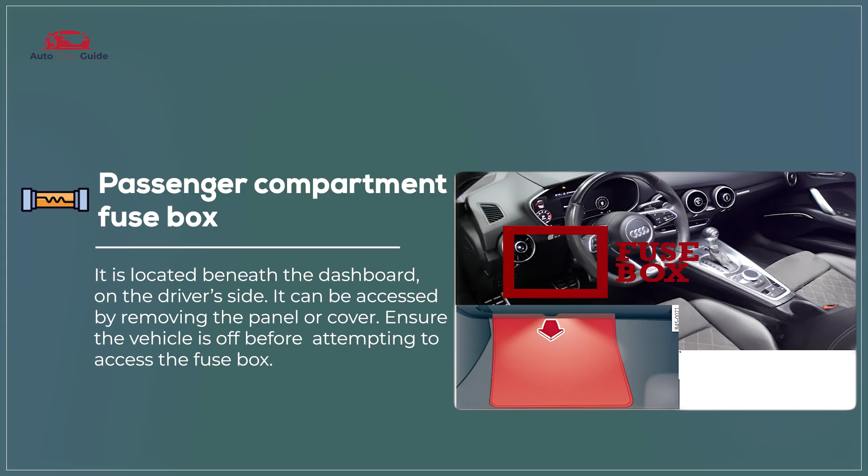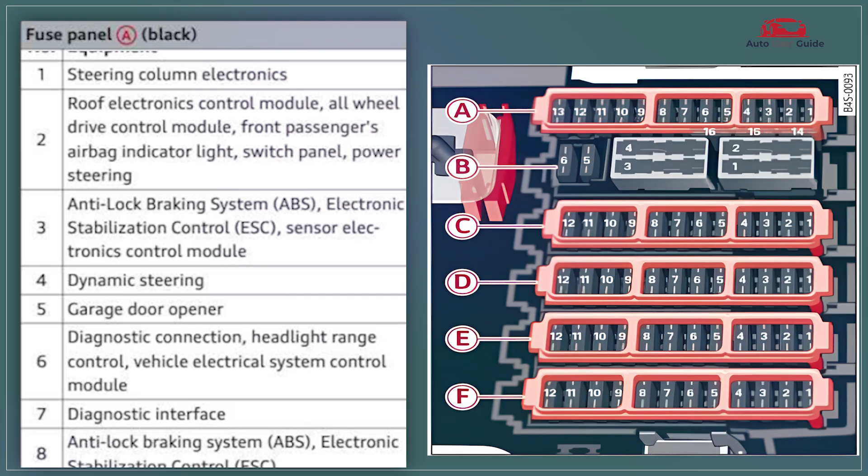The passenger compartment fuse box in the 2022 Audi R8 controls fuses for interior systems like lighting, infotainment, and airbags. It is designed for easy access and quick fuse identification. The box helps protect essential electrical circuits inside the cabin.

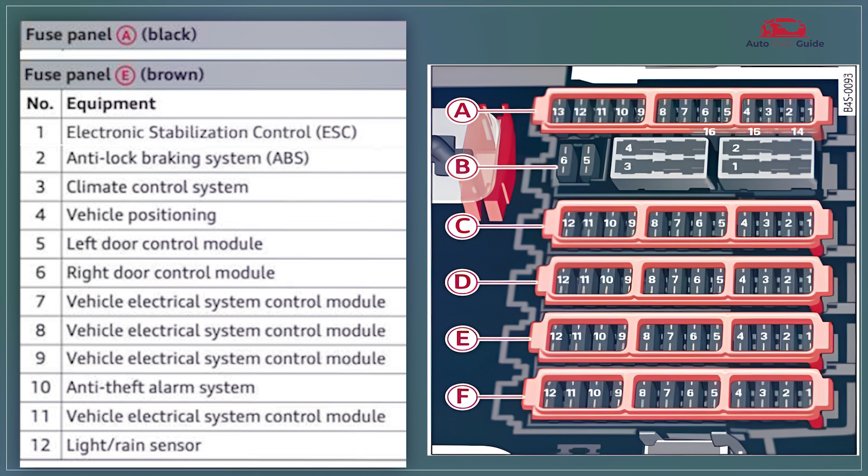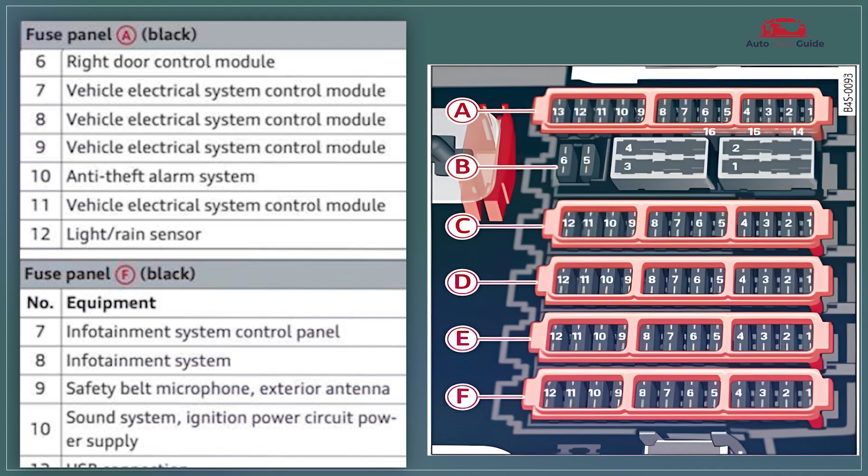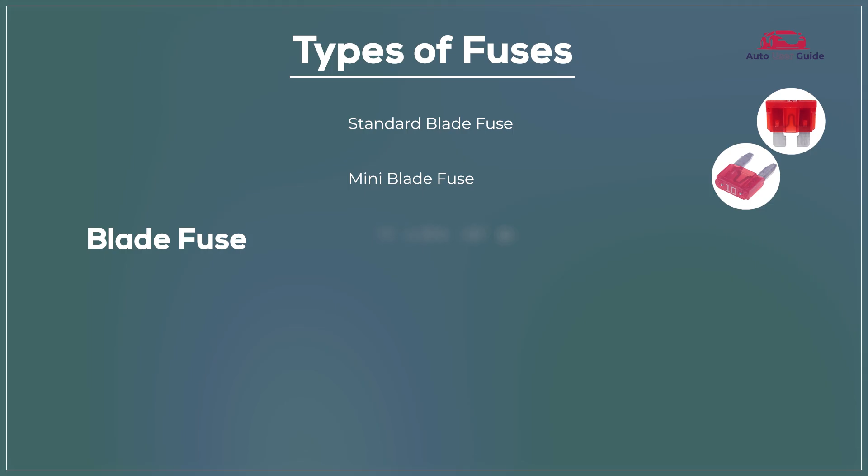Types of fuses: blade fuse, standard blade fuse, mini blade fuse, maxi blade fuse, micro 2 fuse, micro 3 fuse, J-case fuse.

Fuse types continued: AGC fuse, SFE fuse.

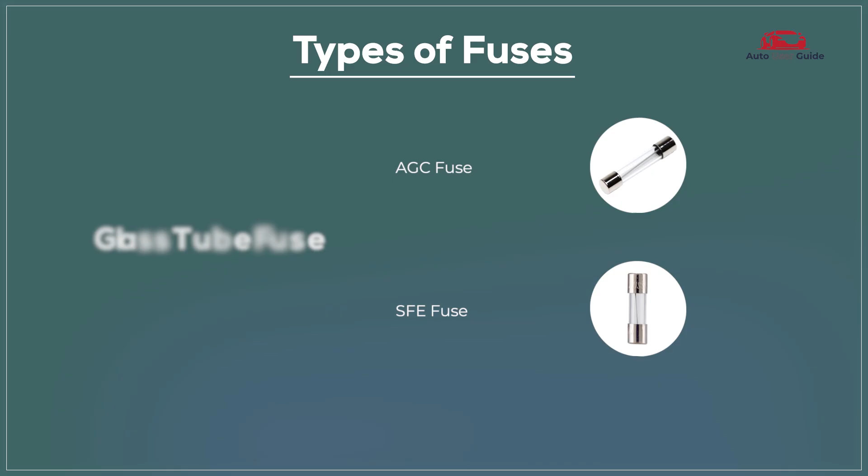Ceramic fuse, Bosch fuse, DIN fuse.

Link fuse, mega fuse, high amperage link fuse.

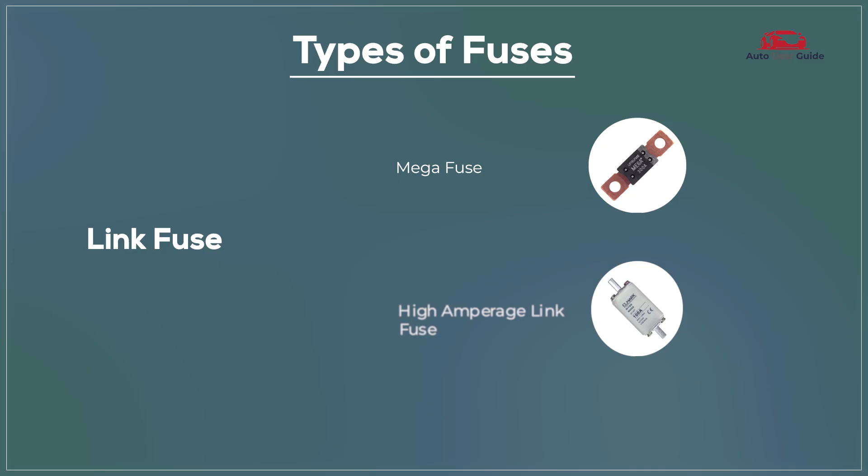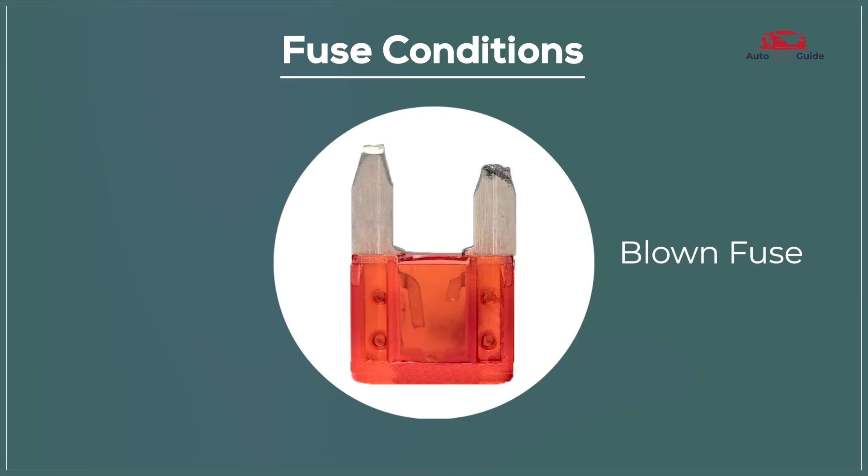Fuse conditions: a blown fuse means it's no longer functioning and needs replacement, while a perfect fuse is in good working condition and performing as expected.

How to change fuses: turn off the vehicle, locate the fuse box, identify the faulty fuse, remove the faulty fuse, inspect and obtain a replacement, install the new fuse, and test the replacement.